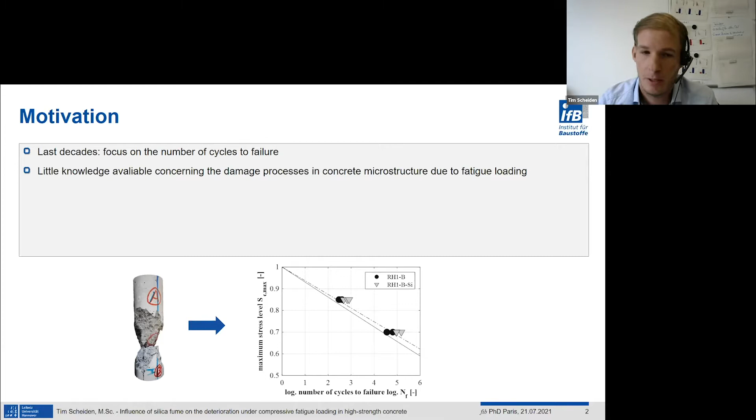In the last decades, research focus on concrete under fatigue loading was mainly set on the number of cycles to failure. Due to this, only little knowledge concerning the ongoing damage processes in the microstructure of concrete is available. Furthermore, it is known that the concrete composition and the resulting properties in the microstructure influence the mechanical behavior of concrete. Silica fume, for instance, leads to a strengthening of the cement stone matrix and the interfacial transition zone.

This leads to an increase of the compressive strength under static compressive loading. But to which extent the silica fume improves or worsens the behavior under fatigue loading, and how the ongoing damage mechanisms are characterized, is not documented so far.

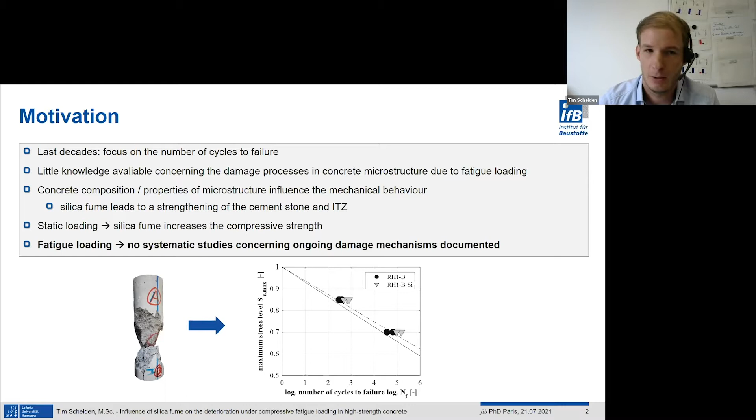Therefore, the main objective of this research is to examine the influence of silica fume in high-strength concrete under fatigue loading. Two concretes were investigated: one reference concrete without silica fume, and one concrete composition with silica fume. The storage and testing conditions remain constant.

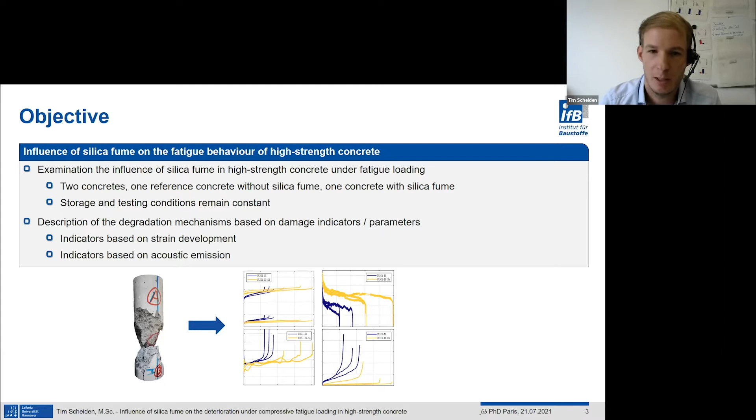With these concretes, the degradation mechanism based on damage indicators and damage parameters will be described. The considered damage indicators are based on the strain development and on the acoustic emission.

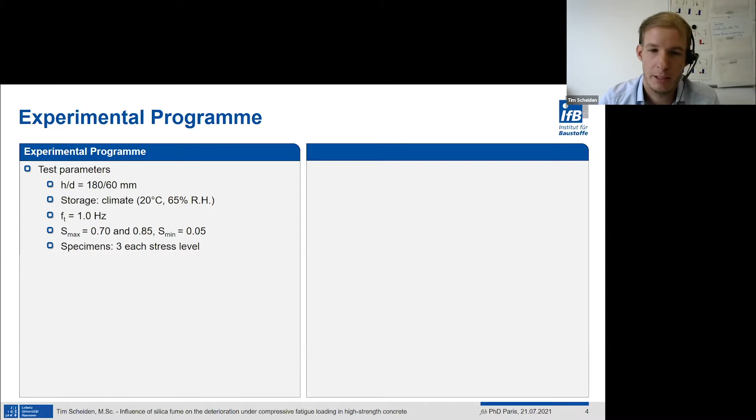To investigate the influence of the silica fume, systematic tests with cylindrical specimens with a height of 180 millimeters and a diameter of 60 millimeters were obtained. The specimens were stored in climate chamber conditions with constant temperature and relative humidity. The sinusoidal load frequency is set to 1 Hertz constant, with a maximum stress level of 70 and 85%, and a constant minimum stress level of 5% of the reference strength.

In the first step, both concrete mixtures, which differ in the addition of silica fume, were characterized. Here we have the RH1B, the reference high-strength concrete without silica fume, which is the reference concrete in the priority program SPP 2020, and the concrete with silica, shown in yellow, which is a variation of the reference composition. As expected, the compressive strength increases, which is congruent with the literature, and the modulus of elasticity also increases.

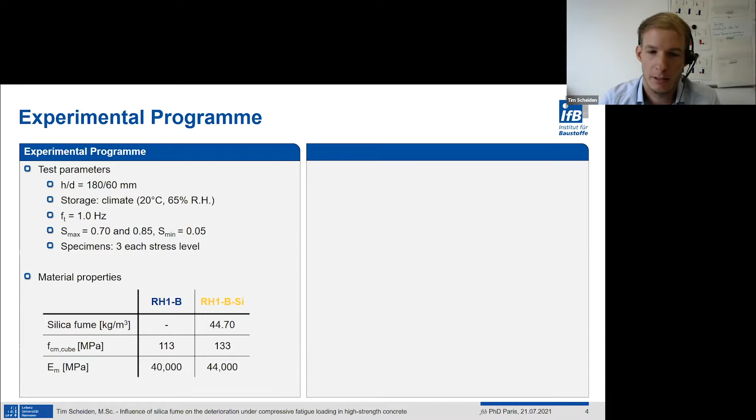So let's come to the first results. For an overall classification of the results in context, the numbers of cycles to failure are presented here. Marked in blue is the basalt concrete without silica fume, and in yellow, the concrete with silica. The results show that the addition of silica fume leads to higher numbers of cycles to failure.

With decreasing stress level, this effect becomes more significant. We also can see that the scattering in the numbers of cycles to failure slightly increased due to the addition of the silica fume. But in general, we can say that the addition of silica fume leads to an increased fatigue behavior, or increased fatigue resistance.

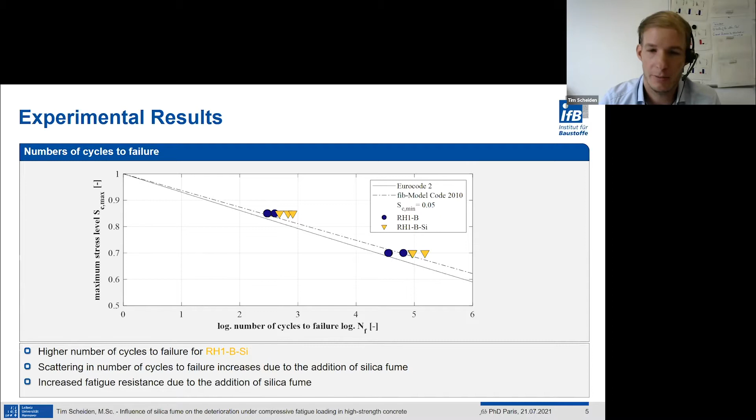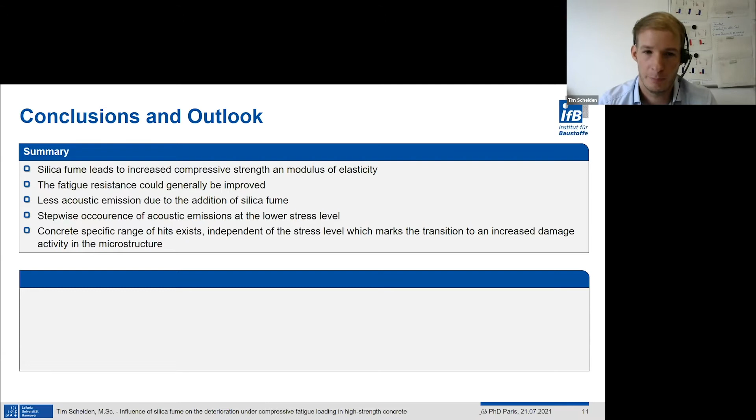In future research, detailed analysis of the acoustic emission hits using clustering methods is necessary to obtain more information about the characteristic of the hits, to possibly assign them to a crack characteristic.

Investigations of the microstructure with different imaging techniques concerning the damage development are still ongoing.

Comparative analysis of the concretes with equivalent mortars to obtain the influence of the presence of coarse aggregates is also still ongoing. This also includes the analysis of the creep recovery behavior in order to evaluate individual damage components based on the strain development.

Within the collaborative project of the priority program SPP 2020, the numerical model shall be extended with the gained knowledge.

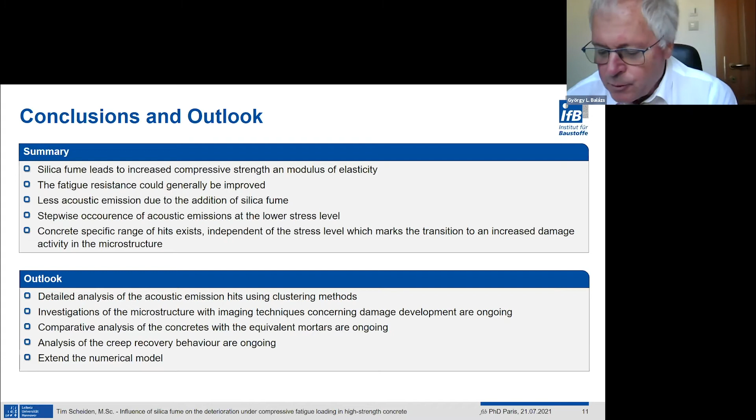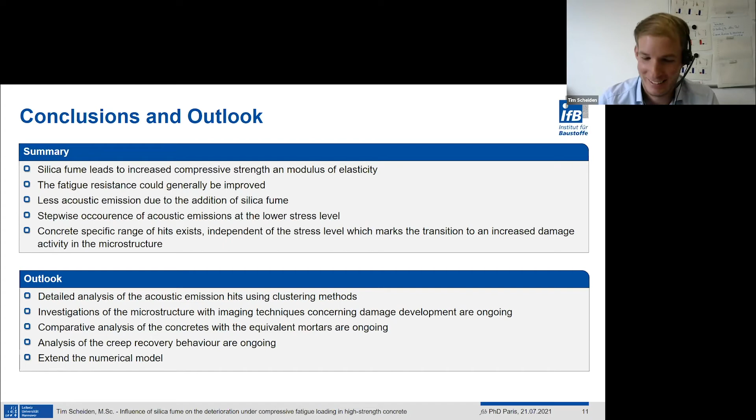Yes, thank you. I would like to have also two questions. I was very happy to see your results. I personally did a lot of tests with fatigue. I was happy to see these S-N curves many times in your presentation, indicating differences with silica fume, so an improved fatigue behavior. I would like to ask two special questions which need a little bit of thinking, and maybe time, so I don't need a final answer. But it's interesting, something I was developing during your presentation.

By applying silica fume and considering the type of deteriorations, deformations, modulus of elasticity, strength, and so on, can you imagine, can you make an observation on an increase of maximum strain in fatigue by applying silica fume compared to the normal concrete?

I didn't understand, can you repeat? Yes, so the failure in fatigue is based on the strain behavior. Failure is reached when a specific strain is reached, so it's not the stress that is important. So is there any chance to increase the maximum strain in case of fatigue by silica fume? Do you think it's possible? Did you have any measurement? I'm speaking about the maximum strain when the concrete fails.

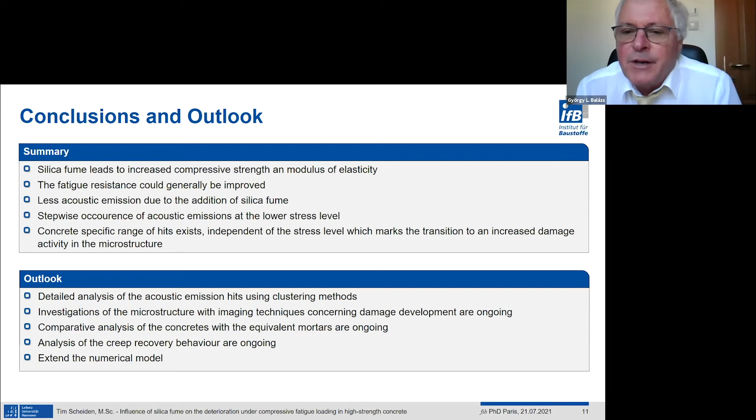The fact is that we have no limit criterion for a strain, so not a limit strain at which the concrete fails. The strain at failure for both concretes is different, so I don't know if strain is the right indicator to predict the failure. How do you predict the failure? If we could predict failure, it would be very, very good. I think to predict failure in general is not so easy.

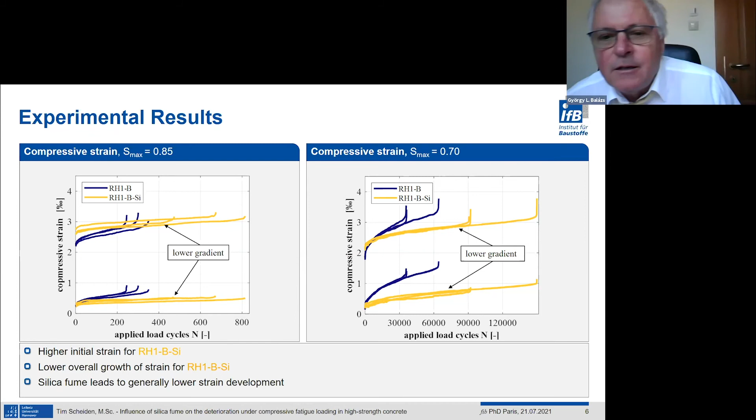But very interesting research. So if you can come back to the first point next week, I would be happy to see that. Okay, yeah. Thank you. Thank you.

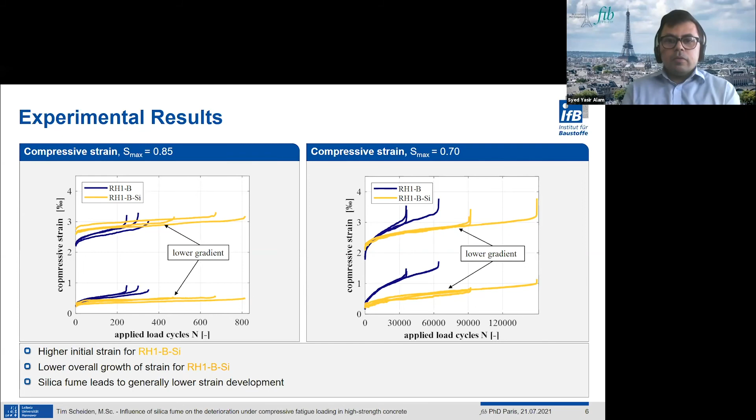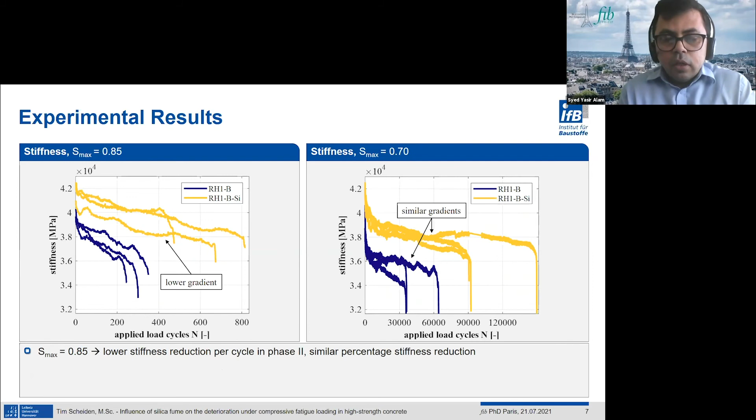So please, I have one question if the time allows. My question is about the acoustic emission that you used. It has two parts. First is about the experimental setup: what kind of sensors did you use in your acoustic emission setup?

Here we use wideband sensors, 6 attached on the specimen, 3 in the lower third and 3 in the higher third, with a distance of 60 degrees, so we have the full 360 degrees. So they are all equally spaced and symmetrical in their arrangement. Okay, because if the cracking will not be symmetrical...

So just to make sure that the sensors collectively capture the same kind of activity in different tests, it's good to have the same attachment for every test and test setup.

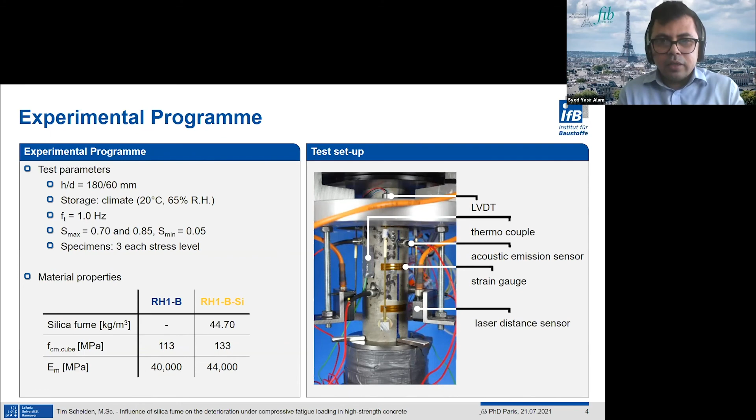So my second part of the question is that in your acoustic emission you basically use 2 parameters: first is the energy dissipation, and second is the hits. Just to make sure, what is your interpretation about the energy dissipation? If there is more energy dissipation, does that mean less damage? Or if you have higher energy dissipation, does that mean higher damage? What is your interpretation for that?

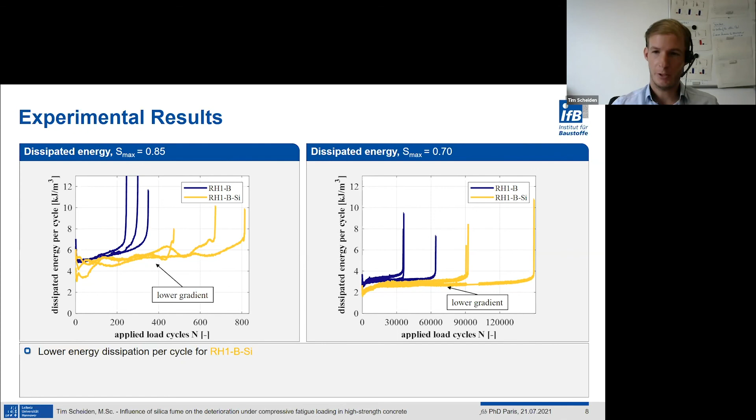Yeah, the dissipated energy shown here is the dissipated energy based on the hysteresis loops from the strain development, it's not based on the acoustic emission. From the acoustic emission, the results shown here are only the number of acoustic emission hits.

But to say what kind of crack we have based on the energy alone is not possible in my opinion, because the energy is calculated as the area, and the area is influenced by the maximum peak level or the length of the hit. So there are more parameters to consider to say something about the ongoing damage mechanism.

So that was what I mentioned in the outlook, that we use clustering methods, which consider more characteristics of the hits to say something about the occurring damage.

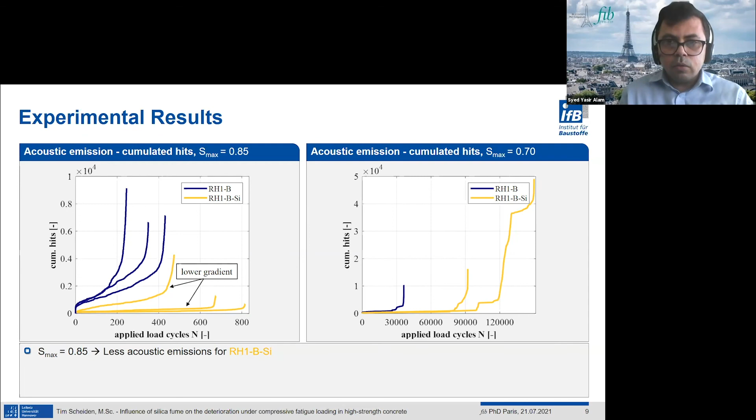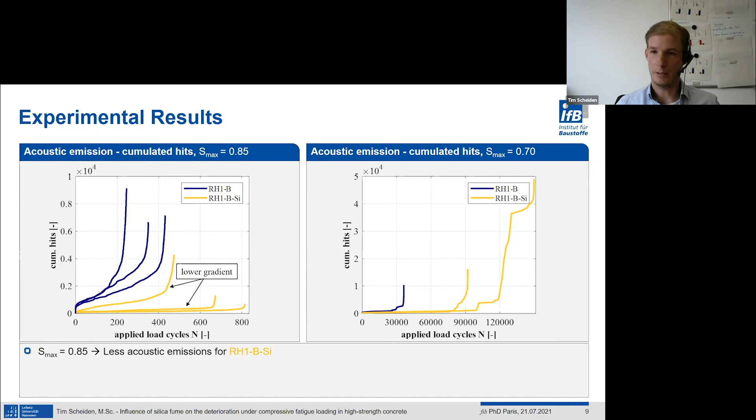So coming to the clustering method, will you use only hits to do the clustering, or will you use other parameters as well? I use parameters from the hits: we use the rise time, the amplitude, and the frequency. Over these parameters we can do a clustering, using different characteristics from the occurring hits. Okay, thank you. Thank you.